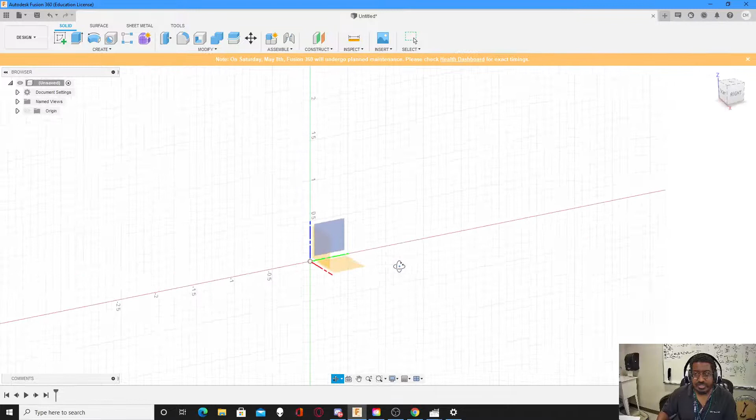So this is Fusion 360 giving you those different views. So you have the right view, front view, top view. And this is exactly what we talked about before, which is you're designing on a particular plane. So the first thing I like to do is design with the bottom first. I start at the bottom and I work my way up. But inside Fusion 360, we can create what they call parameters. A parameter is essentially a variable measurement that you can change at any time. So it supports creating different names.

So if you remember, with our design, and I'm going to go back to that real fast. Our design had a total width or length of 12 inches. Our material was a half an inch, and we had to fit these items in here, right? So this inner side was 7.5. This height was a minimum of 5.5. And then we have all these other things here, right?

So we're going to go into Fusion and make some parameters. You can see that I have my mat depth. That's my material depth or thickness, a half an inch. I already set my inside length to be 12 inches. I set my outer length to be my inside length plus my mat. So really, if I want my inside length to be 11 inches, actually, I'm just going to start from scratch here just so you can see. So let's look at the measurements we need. We definitely need our material depth.

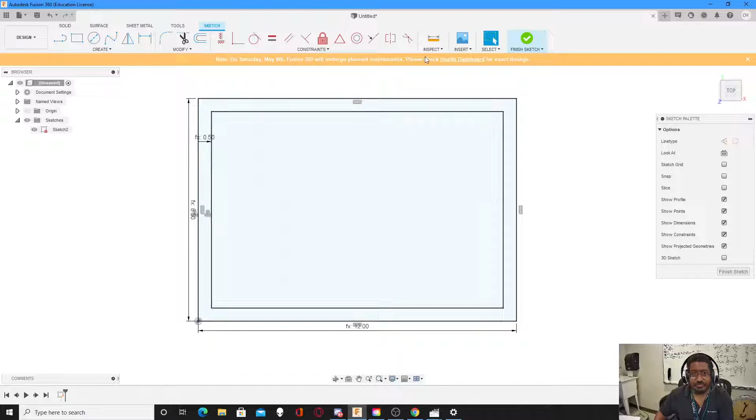Next we're going to factor in our material width. So we are going to offset this material. An offset creates a smaller box, and we're going to offset it by material depth. You see how it made it larger? If I put a negative in there, it makes it smaller. So now this offset is a 1/2 inch all the way around, and this already is our bottom. So we click Finish Sketch, and now we turn it and it's just a flat plane.

We're going to create a new sketch and do the side. Side seems very simple. We're just going to do again a box: outer width, outside length. Should have really named these uniform. Outside height. Now you can see, very simple, I already have my sides down.

Now, remember the material of the side here. The way we have it, this outside is one piece, then we have a piece inside here, and then the outer piece. So we are going to offset this. I'm going to take a sketch dimension here. Nope, that's not what I want to do. I'm going to draw a line right down here, because we're going to draw a new box, because remember, our material width is here. And then we're going to do inside width. Oh, inside length. There we go.

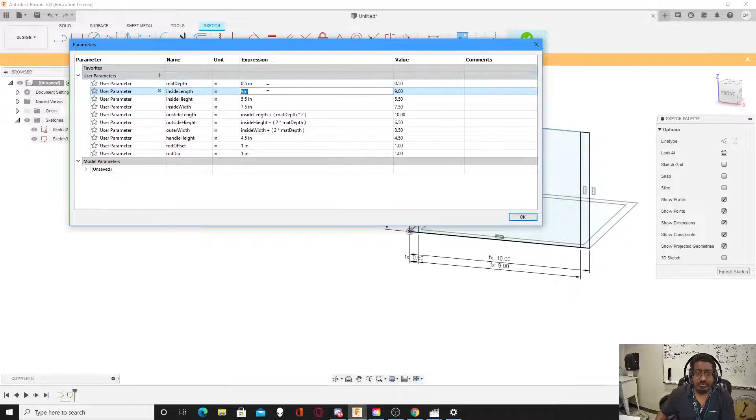So now, whatever we change this material width to, it's going to affect everything else. Very simple. If I go back to my parameters and change my 11 to 9, watch how all of this shrinks, but it still stays in the appropriate proportion. I change this to 2.5, everything still changed to the correct proportion. That's why variables are so helpful, because it saves you a lot of work when you have to make changes. So we are done with that. This is really what our side box will look like.

Do one more. I'm selecting the actual plane I want to do. So now we have to do the back side of it. We're going to do the same thing. Point here, and then outer width, outer height. There we go, my width and my height are here. If I turn it, now we have our box. This is going to be one piece. I don't have to offset the inside to factor in for material, because there is no inner material on this.

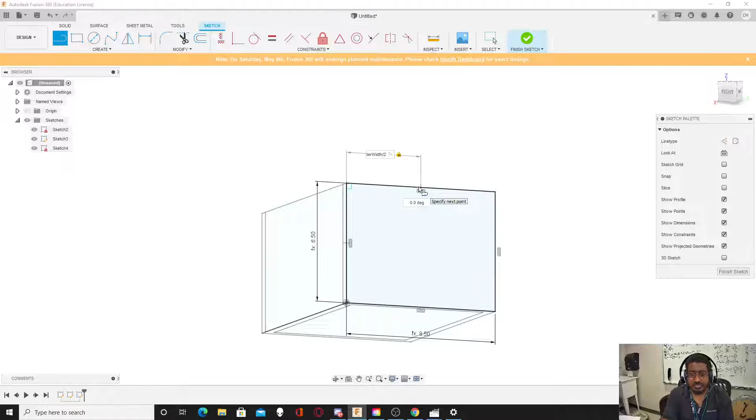So the next thing we're going to do, I'm going to draw a line from here to here, and I'm going to say that this is my outer width divided by 2. Fusion supports functions, right? And then this is my height, so we can go handle height.

So you can do it this way. So now this line is attached, or we have these constraints here. So constraints lock objects to other places. So you can see how we have all these objects. So we can constrain an object to the midpoint of another object.

So I want to take this object. You can see how I can constrain it to the middle there. So I can take this midpoint, that one. So now, no matter what happens with this line, whenever this line changes, this line will stay symmetrical to it, or will stay in the middle of it.

So next thing we're going to do is we have our height. So now we want to make that kind of rounded edge that we were talking about. We're going to come over here. I'm going to make this conic. And so I have this conic piece right here.

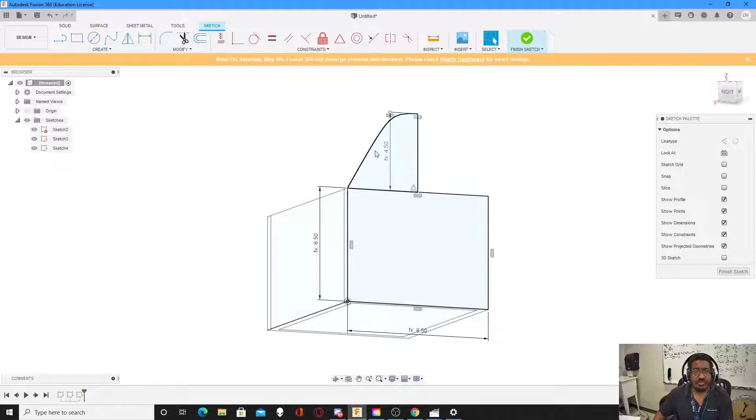All right. And now I want this to be exactly the same over there. I'm going to take this and we're going to literally just mirror it. So the objects are mirrored. Look, my mirror line right there, and you can see now they are mirrored. So when one changes, they both change. Let's make this 6. 4.5. There you go. All right.

So now we have our... oops. To be honest, I'm kind of not happy where this kind of ended up. So we're going to redo this line a little bit. I just Control Z to undo. So now we have our midpoint here. Let's go conic again. Let me make sure I'm looking dead out of here. That way we don't have some weird angles going on.

Yeah. About what we want to do right there. Just like before, we're just going to do this horizontal and vertical. So I'm going to take that, and now those two lines are always going to be the same. We do what we did before. We hit escape to unselect. Select that line, mirror. Select my mirror line. That's my mirror line. Hit OK. Now we have a nice kind of flattened arc.

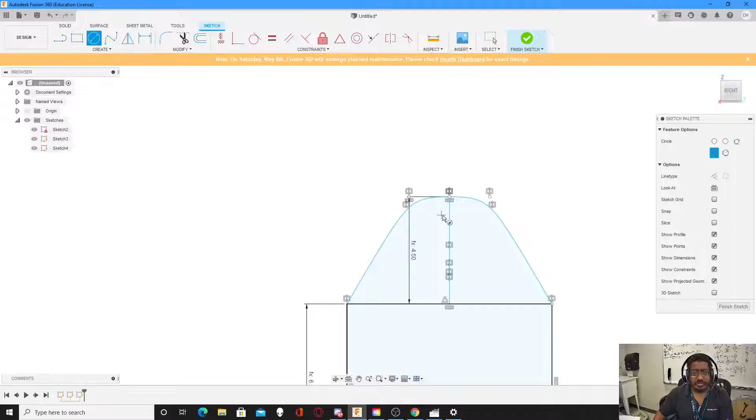We're going to do our circle here. And then this is going to be our rod diameter. You can see here I made a sketch dimension. Notice I click the first dot, click the second dot, click sketch, and now I can set my rod offset, which is now 1 inch.

So if I come back over to my modify here, it's not move/copy. I want to change my parameters. So if I change my rod offset to 2 inches, you see it moves down 2 inches. If I want to change it to 0.25, you can see it moves up there. If I change it to 1, there. Probably 1.5. Maybe a little bit. I'll make this.

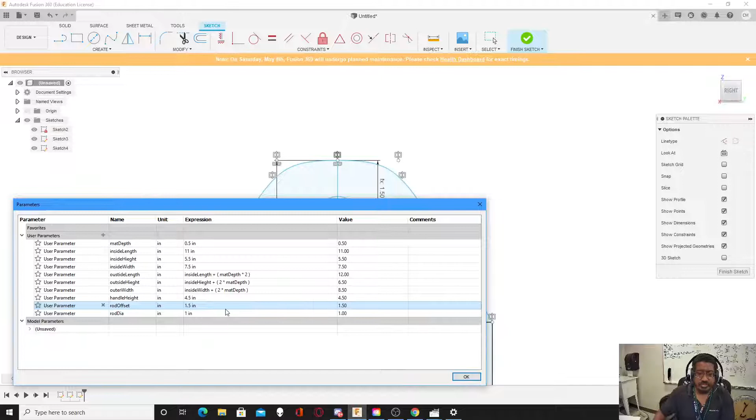It's 1.5. Now, I am thinking I have a box that is 5 inches and a 7.5. But I have this center bar here. I have to have enough space to possibly get this box in and out. How are we going to get the box in and out? That is a very good question. So we'll probably have to make this a lot taller so that it can come in and out. That makes sense, right?

So yeah, let's go ahead. Change this height to 6. Let's change that height from 6. That means we have what? 5.5 inches.

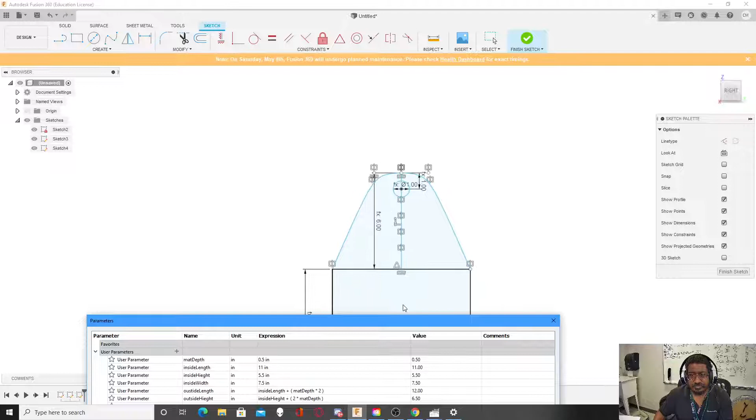And then we will make this 1. So now we have from here to there. So from here to here is 5. So we have 4.5 inches. Hopefully that's enough to slide that box through. This is only 5 high. Go 6.5. Alright.

Alright, so we've sketched all our dimensions, right? So we have all these different guys here, right? We have this, we have this, we have this, we have the bottom, we have this side piece here. We're all set. Now we're going to go from sketching that to extruding surfaces.

So extruding is taking an object right here, and we're going to put our dimension, which is material depth, and you can see an object is created. This is our side, and we're just going to hit OK. And that body shows up right here, so we just make this left side. Alright, and then we can just actually duplicate it.

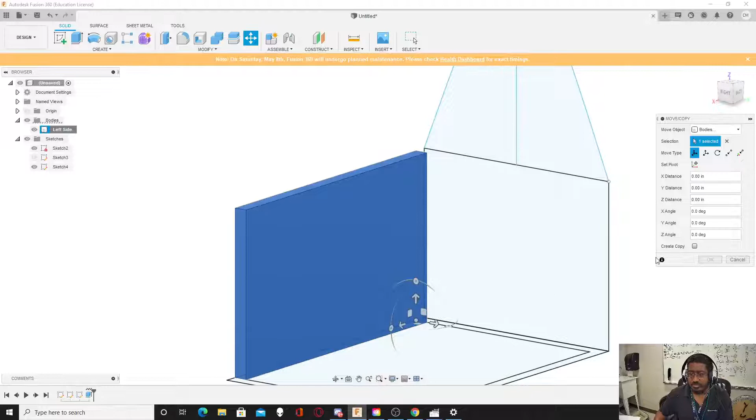Which is by copy and move. And you're saying create copy. We're just going to take this bar, move it there. Now how far does it have to go? Inside width plus material depth. See how we did that? It was material, so it moved over the inside, and then we had to go just a little bit farther from material depth. Next object to make is this.

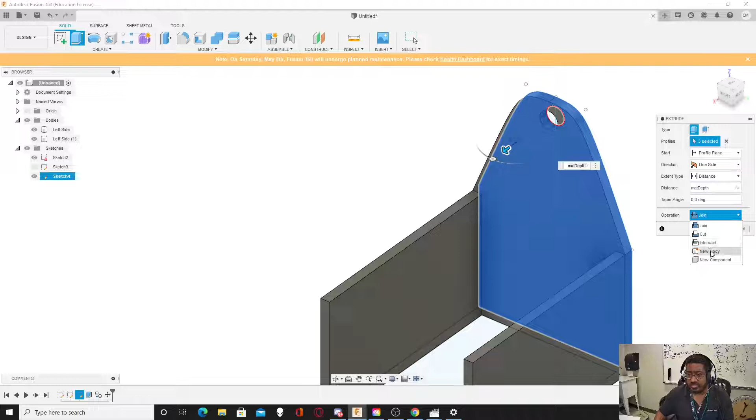Okay. So now we're going to extrude it. So now you'll notice this operation says join. What that means is it's saying this piece that you're extruding is now touching other objects. Do you want it to connect all the objects? Do you want it to cut the objects? Do you want to intersect, or do you just want a new body? For what we're doing now, we're just going to do a new body.

So this way, you can see we have our left side. We make that our right side. We call this front handle. Right. Now we have a hole, right? Now when we put this rod in, yes.

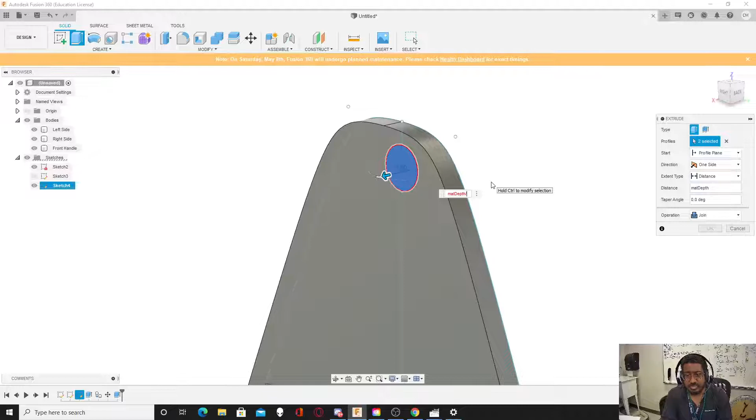Now, you notice that our sketch went away? It's hidden. So you see these eyes here? You click that to unhide it. And now we're gonna want the rod to go in, but we don't want the rod to fall out of the hole. So we're gonna click this area here. We're gonna extrude it, but I am only gonna extrude it the material depth, divided, because I don't want to do the whole thing, by 2.5.

Oops. Actually, I want to multiply it by 0.25. So that will give me a quarter of the depth. And if you notice, the operation was set to join, so now it is just all one object. So we have a front handle. Let's go ahead and move it. Hit M for move. Create a copy. And we're just going to slide it right over here.

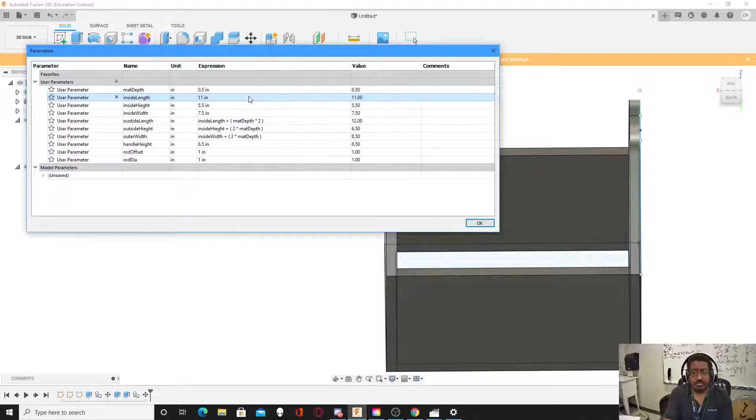Once again, I can do not material, inner width. Oh, nope, not inner width. Inner length plus material depth. So why are we using these functions instead of just writing the numbers? By using functions, if we come over here and we modify a parameter, such as inside length, if we go from 11 to 9, it moves mostly everything. I don't know why it didn't move that one. But even so, it would just be a small modification to move it inside.

So we're going to extrude this. E for extrude. Material depth. We want to go up. And we accidentally joined it. So we're going to hit Z. Extrude again. Material depth. You see it says join, so we're going to do new body. So now we have bottom. Do right handle here.

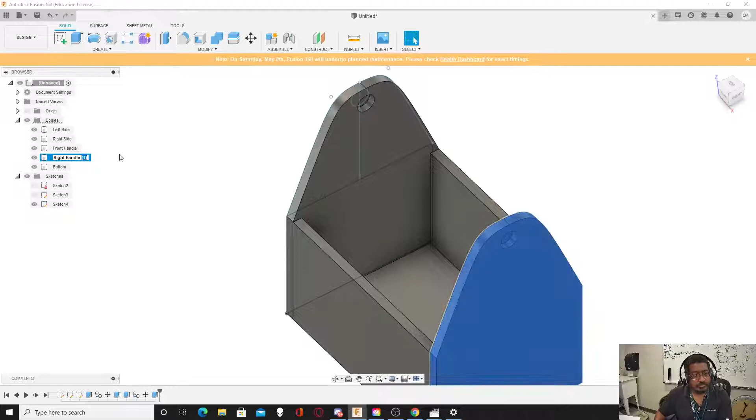Now you notice that the hole for the handle is completely on the wrong side. Right, that does not help us. So we have a couple options. We can fiddle around with this, get the hole reversed, or we can just rotate it. So I hit M for move, which also has a rotate feature. If you look down here, you'll see that you have all your different planes. I can do this. I can turn it this way. I can also turn it this way, which is what we want to do, right? We want to swing it around.

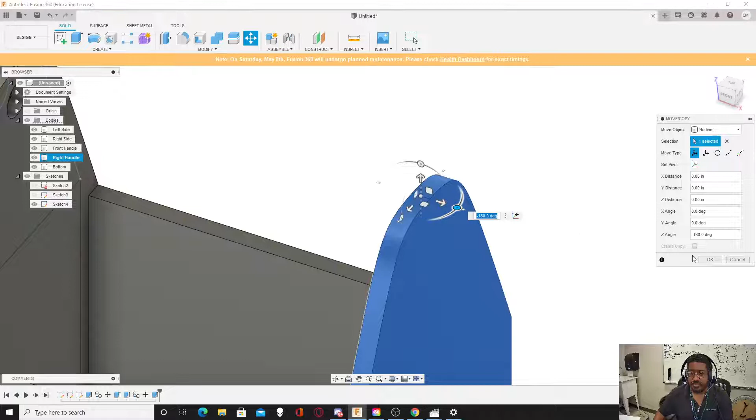Now we can swing it around and then move it back into place, or we come over here and we're going to set our pivot point. You see how when we set the pivot point, it kind of goes, what do you want to pivot on? So we're going to pivot on the center of the object. Select the body. Set the pivot. Hit OK. Now the pivot's set. Rotate 180 and here we go.

Now that that's rotated, we can actually make our sketch go away. So we have the bottom, and then we talked about doing the top, right? So this is a box that's supposed to stay closed. So if we just put a piece of wood on top of here, the wood can just fall right out. So what we're going to do is we're going to make a small ledge on both of these pieces here.

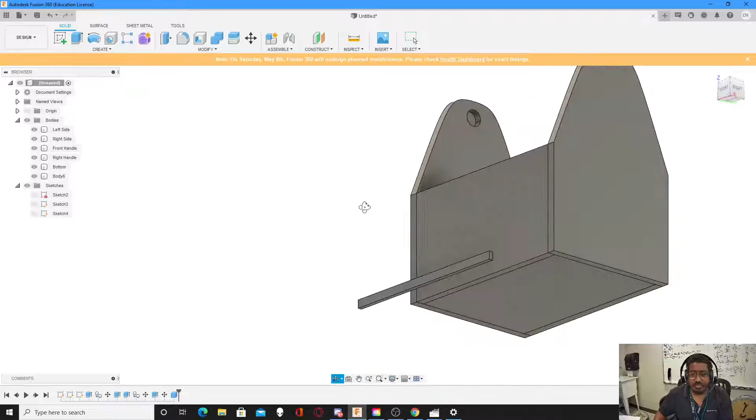So the ledge is going to be done by, I'm just going to go to create a box. Create a box on this plane. And what I'm going to do is I'm going to do inside length. I'm going to do material depth divided by 2. We're going to do a height of material depth. So now I have a box here. So now we're going to use this to make cutouts of our wood here.

I'm going to go to modify, and we're going to align. So it's going to ask you from where. So we want to go from here. It's asking where you want to align it to. So I want to align it there. And now you notice it's aligned on those 2 axes. Next thing is we're going to do a combine. Because with our combine, we have our join, cut, or intersect. So we're going to cut.

So what do we want to cut? Well, I want to cut this guy right here. What do I want to use to cut? I want to use this box. And it says keep the tool. So when this is checked, after I do the cut, I will still have my object. If I keep this unchecked, then the tool goes away. So for our purposes, we'll keep the tool. And then once I move it, we're going to do an align again. So I want to cut the other side, cut that box there, align it here, and then you notice that this cut is here. See?

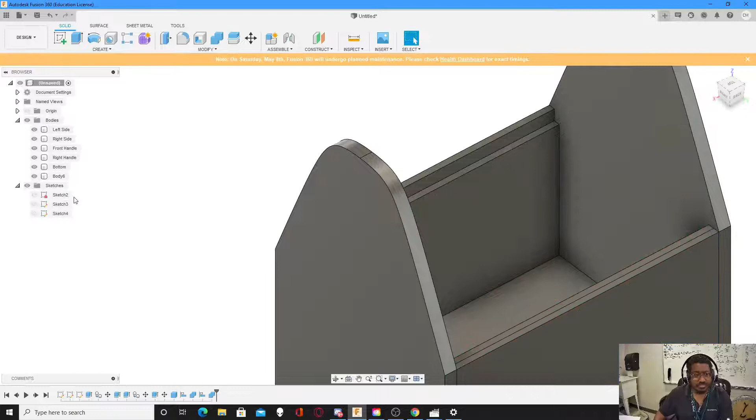All right. We're going to do this. We're going to modify. We're going to combine. What do I want to cut? What I want to use as a tool. And let's just keep it just to stay on the safe side in case I need to use it again. But now I have my lovely cutout here. All right.

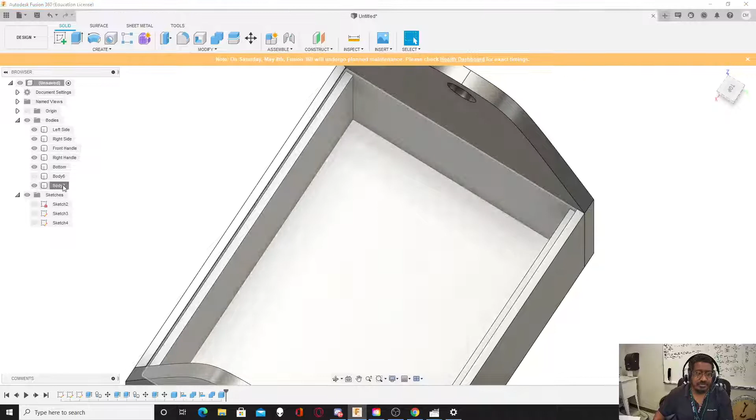Next thing we're going to do is we're going to create one more box. Because the box is going to be laying flat like that, we're going to select that plane. So what's the length going to be? It's going to be the inner length. And then the inner width. But that's going to be short, right? Plus material depth. So why is it just material depth and not material depth times 2? It's a very simple answer. The answer is we cut out half the material width here and half the material width there. So by cutting out half and half, you get math, you get a whole one.

When we created it, we did not do the material width. Let's do that again. Create a point here, really doesn't matter where. We go inner length, inner width, so right here is the height. So it's asking the height again. So we can do material depth. We don't want to cut. We want a new body. Hit OK, and we can see our bodies down there.

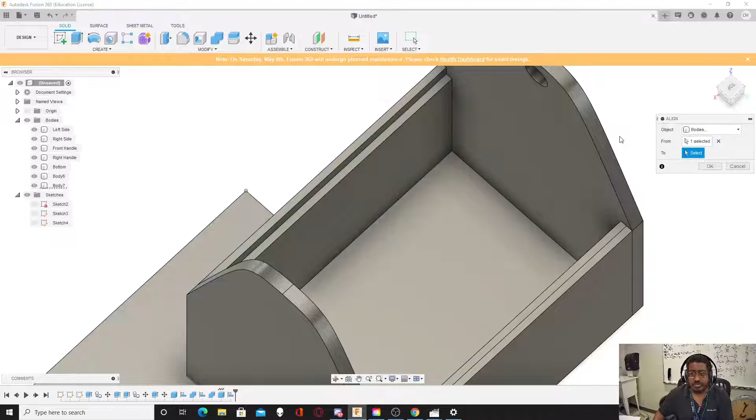And we want to modify to align. So we want to modify from where? See, here's a cool tool. You can hit, kind of make things disappear. There, and then where do we want to go to? Oops. We want to go to there. Oh. We want to select this body. We want to select here on that body. We want that body to go there. Oops. No, we want that body to actually go here. There we go.

And that's right, we did not account for the gap in the inserts. We did not. Let's just go ahead. We can undo all that. So I'm just doing Control Z till the box is gone. Let's try this one more time. Let's see if we can get it right. So we got inner length, inner width plus material depth, material depth. We're going to do new body.

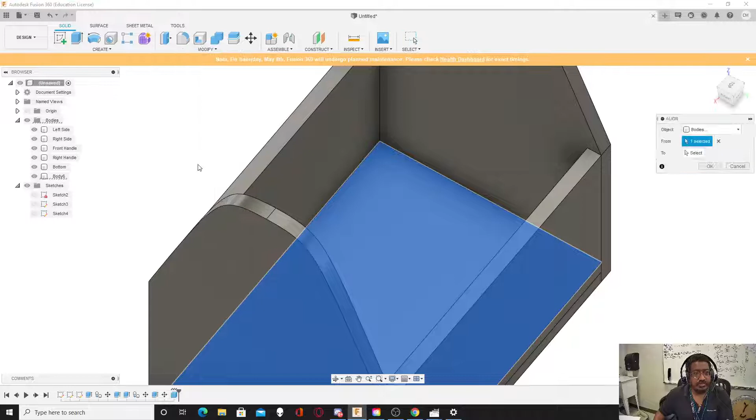Now we're going to align it. So we're going to take that point. We want, oh, did I? Oh no. We went too far. We went too far, my friends.

Alright, so there's another way we can do this. So there's a top. So as we said, modify, align. I'll make these disappear real fast so I can get to this point here. At that point. Oops.

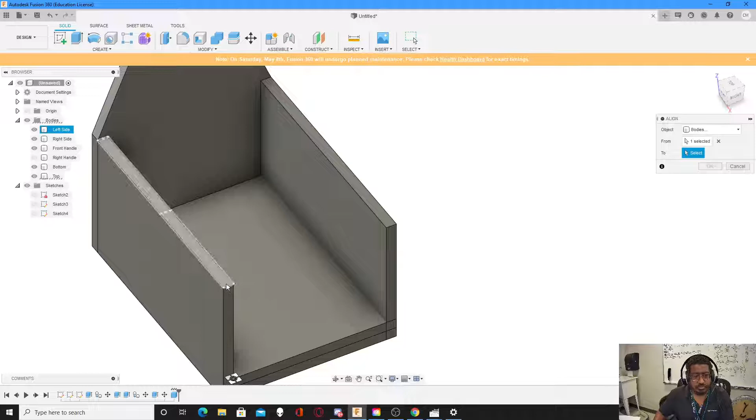Nope, that didn't work. Like I said, sometimes it's a lot of just trial and error to get it to do what you want it to do. So I want to align that point to this point right here. So I'm trying to, come on.

You see how that white box, all right, that's fine. That's fine. We're just gonna try it again. All right, let's align it. That point. That point. That did not work. Sometimes you just fail, but you just keep on moving. All right, so let's get the right point, that point.

Oh, what just happened? Okay. Oh, so many different ways to do this. I don't know why I'm spending my time doing it the wrong way. All right. Basically, we just want to move this so it's halfway. And why is it rotating? There we go. Just switch the angle.

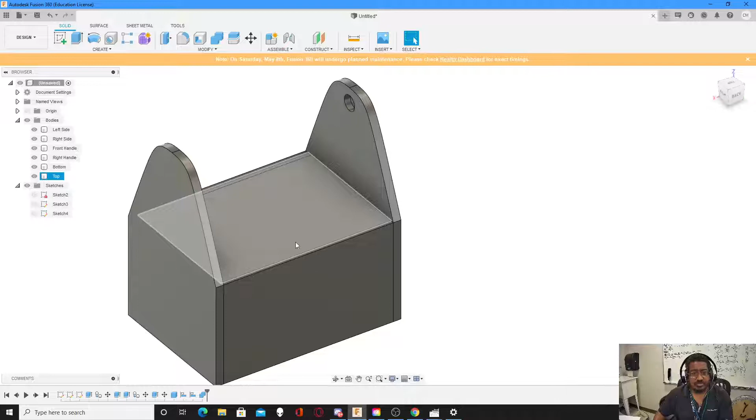There we go. So before I accidentally removed my cut piece, you could see how we have this here. All right. So we're going to do what we did before. We're actually going to do a combine. Oops, wrong button. Modify, combine. So I want to take this, take that, cut, keep my tool. So now if I make this invisible, you'll notice that it's cut because I kept the tool still here.

We're going to do the same thing over there. So I'm going to take my target, my tool, cut, hit OK. Top disappear, and you can see that cut is there. Now, part of the plan is to use a magnet underneath here. So we're going to actually just trim this down just a little bit.

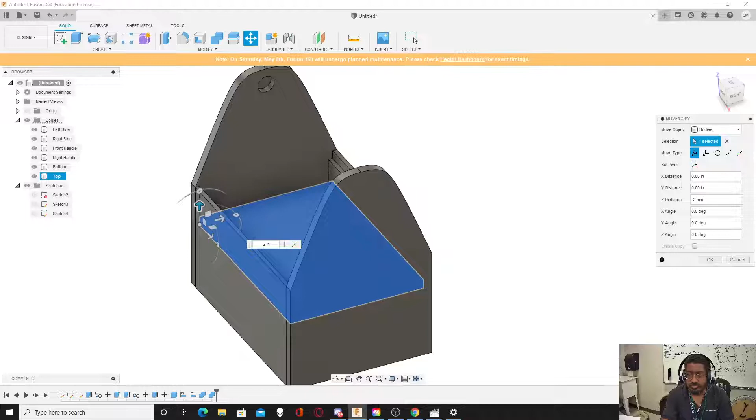We're going to move it. So we're going to move it. Move it. Two millimeters. You notice I can change my measurement here. I'm not using inches, I'm using millimeters. Actually 3 millimeters. Then we're just going to do the same thing again.

I'm just going to find my target, my tool, keep the tool, cut, combine, rotate here, tool, cut. And now I'm just going to take my top, I'm just going to align it back. That, part of this, boom. There we go.

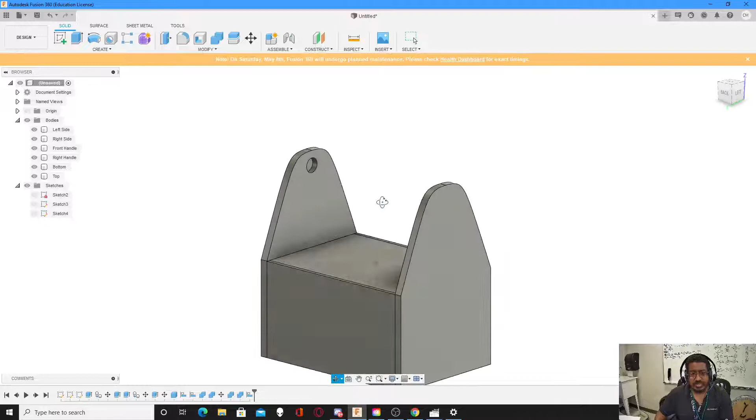Now I don't have the dowel in here because we are going to just purchase it. So there's no real reason to model it unless we just want to do it for looks. Essentially that's it. Now you can see through here you can also have what we call a section analysis. So with the section analysis you can actually see inside your model. So you can see we have room for the magnet in there, because that's going to be the magnet space.

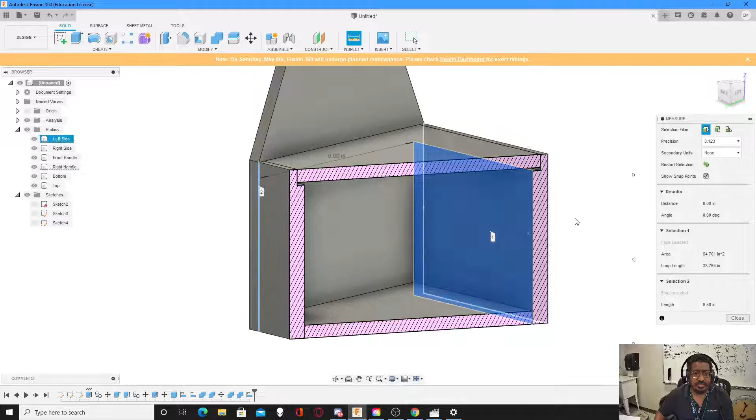And then you can also measure between different points. So if I want to measure, like this is 5.5 inches. So you can see you have different measurements here. And then you just reset. 7.5 inches. You can see different points, like from there, there's 8. This whole thing is 1 because it is 1 inch thick.

You can see the length is 6.5. There's a 1/2 inch there. We can measure from bottom here to the top there. So it's a total of 13 inches. A little bit bigger than what was expected, but that should give us room to get that in and out as needed. Otherwise, we don't really have a way to get them in or out. Alright, so we're going to stop it there, and then we're going to pick up on how to actually get it into the CNC machine.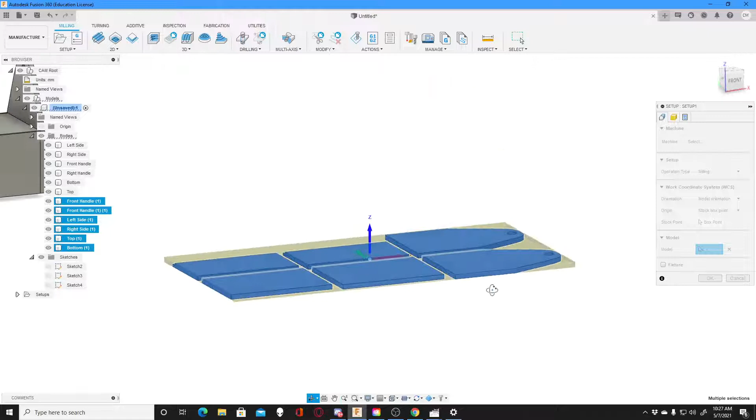Alright, so let's set this up. So what is... 37 inches. There's 7 inches. 18 inches. So I come here. I'm just going to rotate this.

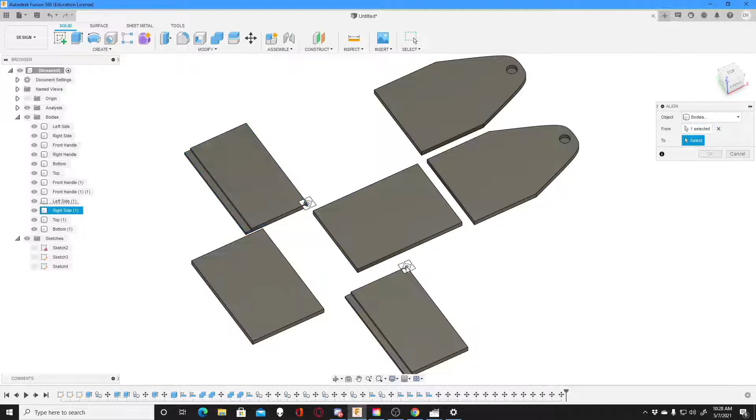All right. Oh. Why are these guys 2 different sizes? Oh. One's the top, one's the bottom. Okay. That makes sense.